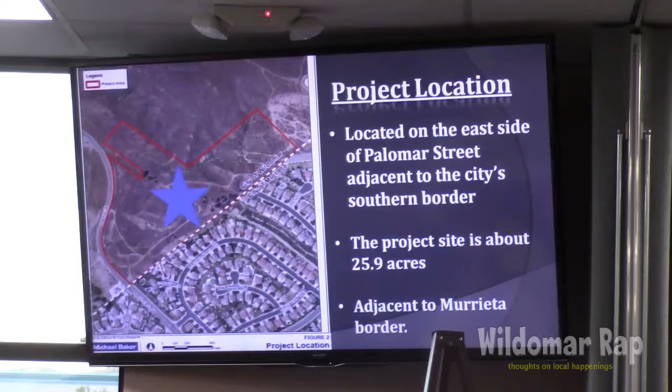This is a Camelia Townhome residential project that the commission is reviewing tonight. I want to make clear that the commission will make a recommendation to the city council on the resolutions in the agenda packet. The project is located at the southern end of the city border near Murrieta, where Palomar Street turns into Murrieta. The site is about 25.9 acres, quite hilly, and adjacent to the Murrieta city border.

The applications the commission will look at tonight are the initial study mitigated negative declaration covering CEQA requirements, a change of zone from rural residential to R3, our general residential zone, and a tentative tract map 37156 for condominium purposes, plus a plot plan for development of 163 for-sale townhomes. There's been some speculation these were low-income affordable housing, but they are not—these are for-sale townhomes.

For the CEQA process, Bob Stark is here from my consultant team, Michael Baker, who prepared the environmental document. We circulated the MND from January 19th to March 3rd and received 6 public comment letters on the draft. In accordance with CEQA guidelines, we prepared a formal response to comments package, known as the final MND, which was mailed to each commenter 10 days prior to tonight's hearing. The initial study concluded all environmental impacts have been adequately mitigated, and they're included in the plot plan conditions of approval matrix.

The change of zone is being requested from RR to R3. The R3 zoning is consistent with the existing MHDR land use designation, our medium high density residential designation. That land use designation has existed since at least 2003, probably further back. When we incorporated, we inherited the land use plan from the county, which had the same designation as it does today. So there is no general plan amendment, just a zone change to accommodate the townhouse project.

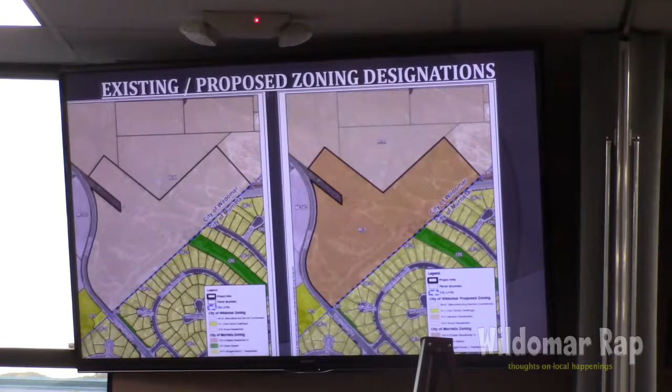A map is needed to subdivide the property for the for-sale townhome project. There are 20 parcels that will make up the map, 5 of which are open space parcels. Each parcel exceeds the minimum lot size and lot width and depth standards of the R3 zone. Findings have been made to support a recommendation of approval for the map to the City Council, subject to conditions.

The plot plan is the development plan for the project: 163 townhomes. Each 2-story building has 6 units, with about 30 buildings spread throughout the site. The applicant is providing 3 floor plans with 2 and 3 bedrooms to choose from, ranging in size from 1,400 to just under 1,700 square feet. All units will have a 2-car attached garage with direct interior access, and there's visitor parking throughout the site.

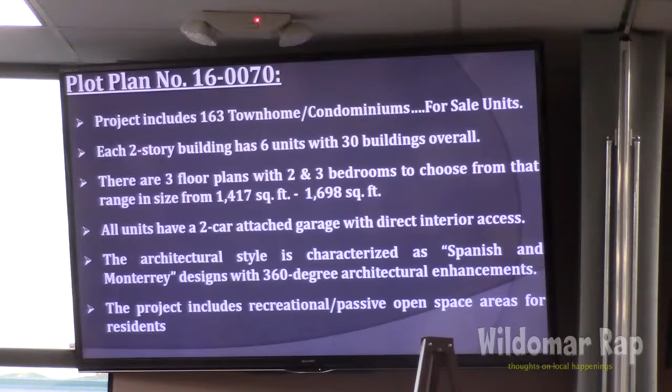The architectural style has been characterized as a Spanish and Monterey theme. We applied 360-degree architectural enhancements around the buildings. The project also provides recreational passive open space areas for future residents of the community.

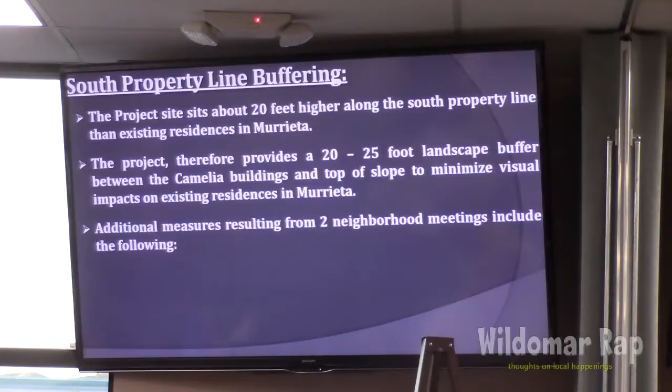We did that primarily to minimize the visual impacts on existing residences in Murrieta. At this point I should mention we've received a number of comment letters from Murrieta residents—about 4 more came in just before the meeting—so you have all of those, and the comments were emailed to you. The Commission is aware of the issues listed in each of the letters.

The applicant also had two neighborhood meetings and agreed to several things, and I think they'll have additional measures they want to let the Commission know about. In terms of the windows facing southward, they're going to put in fixed frosted windows to obscure views looking out of the units into the backyards.

It's important to note there is a 20 to 25 foot buffer at the top of slope. The site sits higher, and as it comes down towards Palomar, that height variation lessens, but there's about a 20 to 25 foot buffer at the top of slope that will be landscaped.

The landscape plans also show the slope leading down to the property line, which will be the rear property line of the Murrieta residence, will also be landscaped. The applicant decided to increase that landscaping, so when construction plans come in, they'll show the enhanced landscaping on that buffer area as well as the slope area to help obscure views.

I was told that a 6-foot block wall at the top of slope would be constructed. That would also help obscure views looking southward, as well as shield lights from the driveways as cars come down heading south into the individual garages.

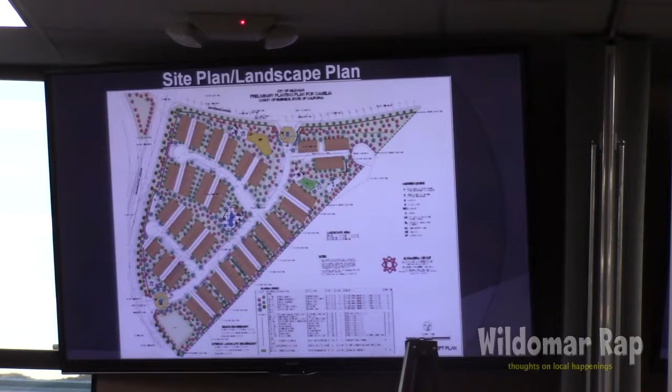In terms of fiscal impacts, the project will pay about $2.7 million in development impact fees, including our DIF fees as well as non-city regional impact fees such as TUMF and MSHCP. The project is conditioned to be annexed into the citywide CFD, which will negate any fiscal impact to the city's general fund, and it will also pay into the Measure Z park tax, which based on the number of units will generate about $4,500 annually.

Staff's recommendation is for the Planning Commission to adopt the following resolutions: approval of Resolution 2017-07, adopting an MND and MMRP; 2017-08, approving the change of zone from RR to R3; PC Resolution 2017-09, approving the tract map subject to conditions; and PC Resolution 2017-10, approving the plot plan to develop the 163-unit condominium project subject to conditions. That concludes my presentation, and I'm able to answer any questions the commission has.

There's an overall look. We did an entire elevation of the entire site as it's seen from the adjacent residential tract. Again, we showed where the existing grades hillside was. We showed what our grades were, what their grades were, and we did an initial planting elevation of what the landscaping would look like, and then we did a maturity elevation, which for these particular trees will take about 5 years. And we have our landscape architect, Mr. DiDonato, here tonight to address any detailed comments and concerns.

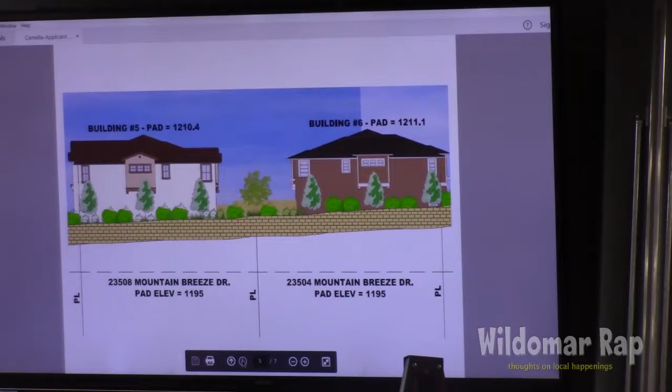Here what we did was we did a blow-up of that. And again, you're looking at the wall that's in the backyards of the existing homes, our grades and the street addresses for on each one of these. And then if you go to the next slide.

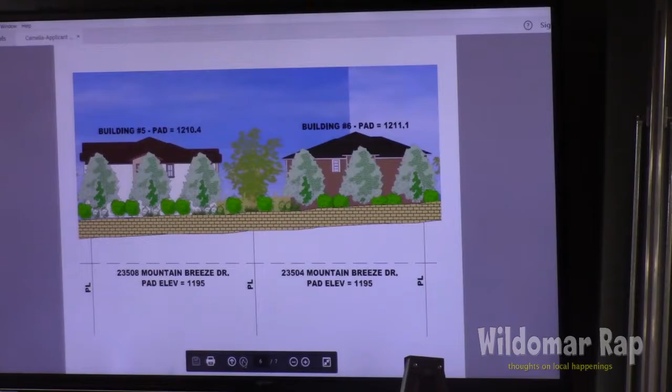And so in addition to that, we had our architect take a look, Mr. Addison, who's here tonight also to address you. And what we did was we had him take a look and see what he could do on those in-view elevations. And we moved the upstairs windows up a little higher so they weren't at eye level.

Those are sliders. They have to be sliders for code purposes. On the downstairs windows, though, we turned those on those end units adjacent to the existing residence into either frosted glass or inoperable windows, so they cannot either be open or cannot be seen out of. And in addition, there is the 6-foot wall.

So additionally to that, there also, if you go to maybe the landscape plan. Back. Keep going back. Be near the end of the diagrams.

We did have a basketball court that was on the south boundary, and some of the neighbors brought up a very good comment and concern about the potential noise from that, so we eliminated the basketball court. We already had one bocce ball court. We actually incorporated a second bocce ball court on that boundary, which we felt would be more in keeping with the quieter nature of that south boundary. So the basketball court was eliminated.

So those are basically the initial things that we did pursuant to the questions that came up at the March 6th meeting. Additionally, we went out and got proposals from a construction forensics firm to come in and give us a price to videotape and photograph all 15 of the adjacent units, so we could establish both exterior and interior, and potentially even the roofs, to establish a construction baseline before we would start construction, and we would be happy to accept that as a condition of approval.